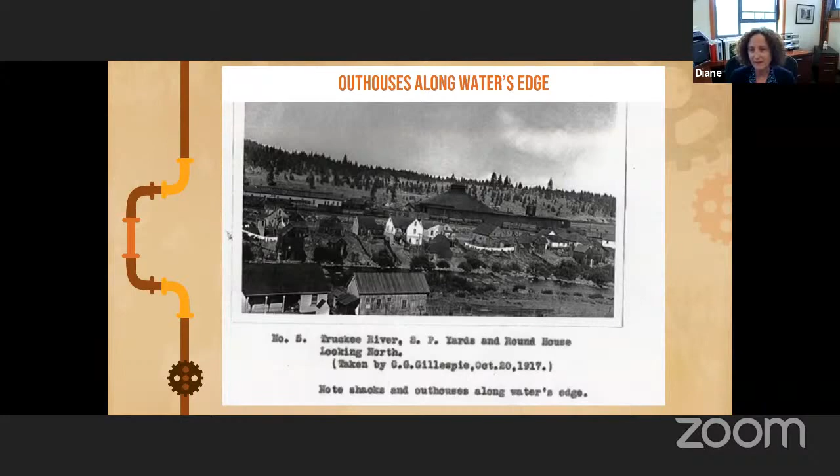Excellent. So the district did make the improvements, one of them being conveying wastewater over the Truckee River instead of into the Truckee River. They formed sewer ponds, which you can see from the 267 bypass bridge, where all the waste came to be processed, percolated, and filtered back in. That was the improvements the district made through the 1970s.

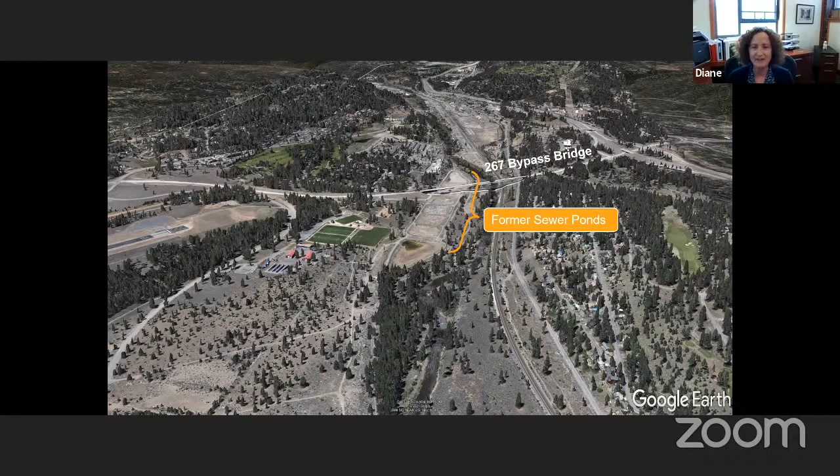So in the next slide, we're going to look at how the district did expand. From 1909 to 1950, the district just serviced the downtown community commercial area. Then in 1950, there was an expansion to the Gateway area, where Safeway, the hospital, and Truckee High School are now.

Then came the 1960s, and testing was done on Donner Lake, finding a high coliform count, which is an indicator of fecal matter. This was mainly due to cabins built along the lake with septic tanks, and the septic tanks were failing. So at the urging of the county, the district went into that area, laid sewer lines, and most of the septic tanks were removed.

Then came the 1970s, and there was further expansion into the Tahoe Donner area, and below that the Northstar area. Also in the 1970s, the Tahoe Truckee Sanitation Agency was formed as a result of the Porter Cologne Water Quality Control Act, which mandated that all sewage be exported from the Lake Tahoe Basin. So the plant was built, and by 1978, it was open.

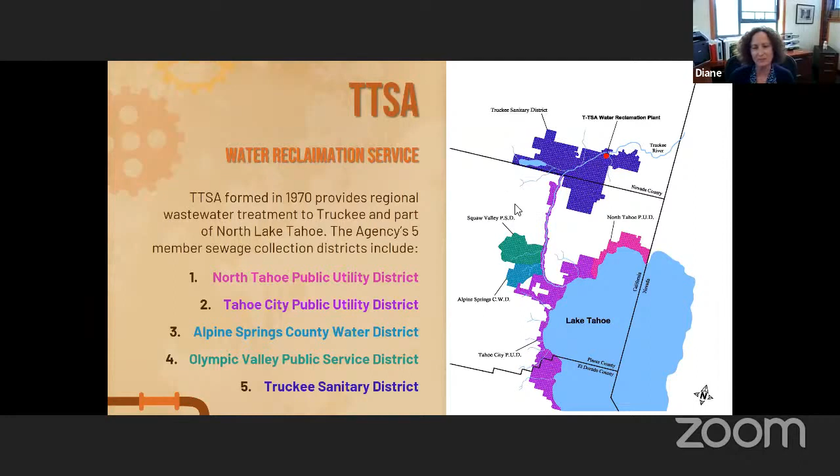From that point on, the North Tahoe PUD, the Tahoe City PUD, the Alpine Springs County Water District, the Olympic Valley Public Service District (formerly known as Squaw Valley), and the Truckee Sanitary District conveyed their wastewater directly to the TTSA water reclamation plant. We got out of the business of processing the sewage, and instead we collected and conveyed the raw sewage to the reclamation plant.

In the 1980s, we extended our service to the Glenshire area. And finally, in the 2000s, as the area was expanding, there was growth in the Grays Crossing, Old Greenwood, and Martis Valley area.

Now I'm going to pass this on to Kellen, who will talk about the operations end of our district and what we do.

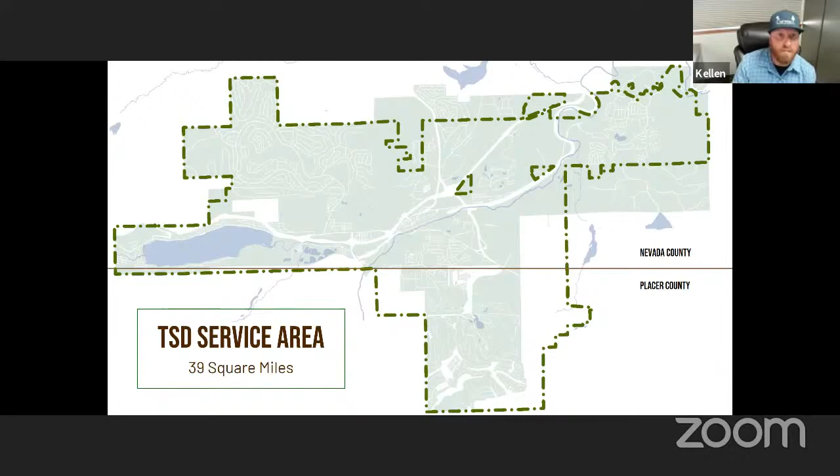Thank you, Diane. My name is Kellen. I'm going to be talking about the assets and operation and maintenance of Truckee Sanitary District. Truckee Sanitary District operates in a 39 square mile area, and we cross 2 county lines. Our main way of collecting the sewer is by gravity and lift stations or pump stations. As you can imagine, we have a very mountainous area here, so we have a wide variety of areas that we actually have to pump out of.

We have 215 miles of gravity pipe. Gravity is obviously our easiest way to collect, so that's what we try to do. That services 13,132 laterals, which are your homes and businesses that we're collecting from. When we can't use gravity, we need to be pumping. So we have 44 lift stations, and those pump into what are called force mains, and we have 16 miles of force main. With gravity, sewer tends to be cleaner and flow better if it's a minimum of 2% grade, which makes it so the solids flow nicely down the pipe and don't clog it. When it's not, we go to other lift stations.

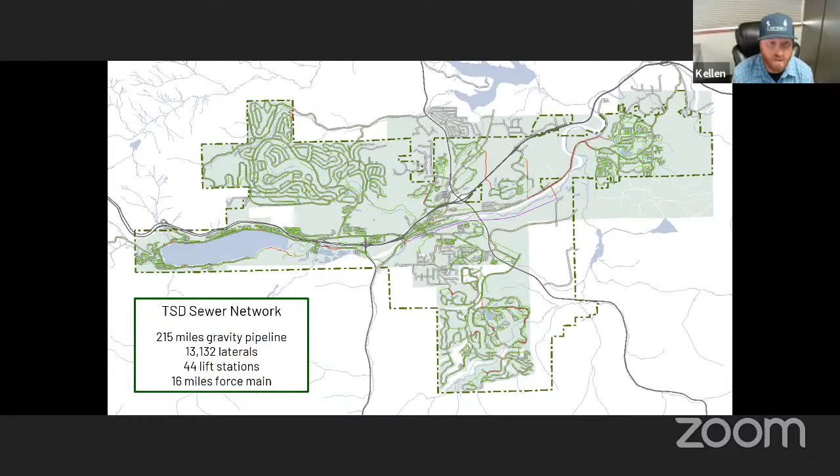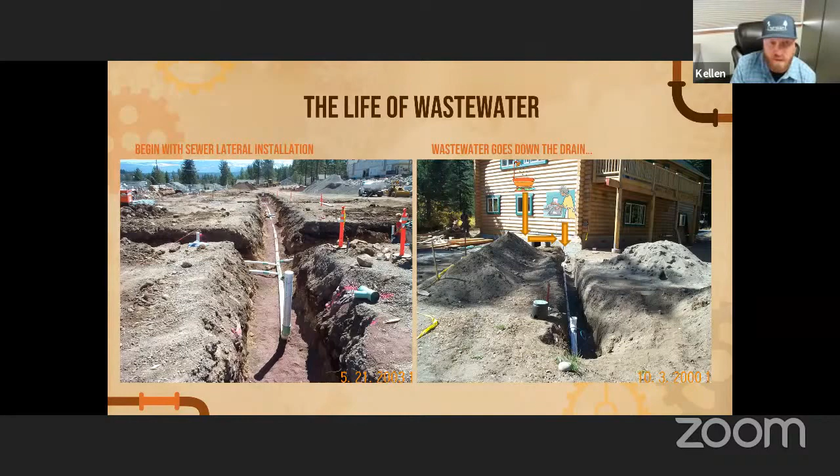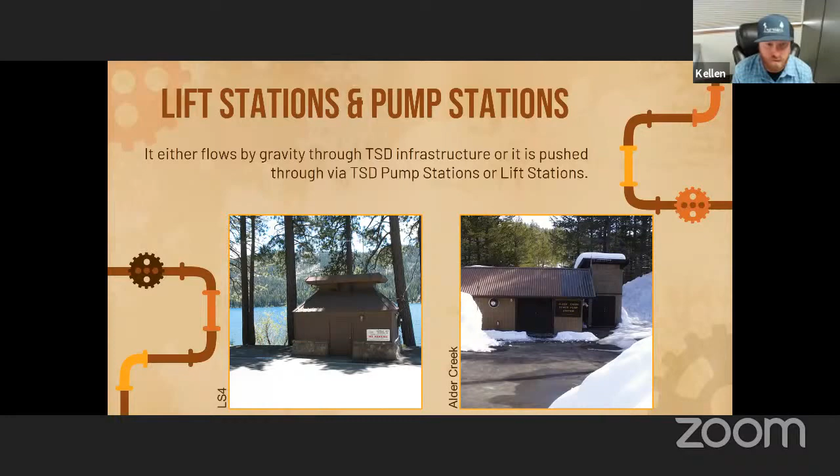It's pretty cool stuff. It's really bad if one of these plugs up, so we have to have a way to actually bypass that.

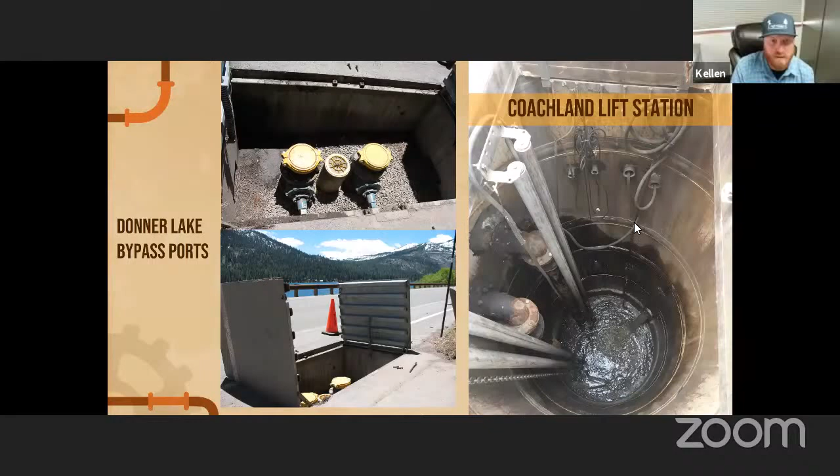Yes, your audio is a little bit staticky. Is anybody else getting static from Kellen's? I'm not sure whether your hands are on your board or something, try and hold as still as you can. I'm afraid maybe it's picking up something else, but hopefully that'll help. Go ahead. Yeah, I don't have it. It's okay.

So now we're getting down to the nitty gritty. Sometimes things get caught in your pipes and block your sewer lines. And so when that happens, we actually have to bring out specialized equipment. We also use this equipment for cleaning and other things.

So this is one of our main workhorses, called a Vactor truck. As you can see on the front, there's a big hose reel, a 1-inch hose reel that we use to clean the sewer lines. Going up and above it is a giant pipe, and this truck is basically a giant vacuum. We use these trucks to clean your wet wells, to hydro excavate, which we'll go over in a little bit, and also in case of emergency, then we need to be sucking out of a manhole, which we hope never happens. I'll talk a little bit more about it here in a second.

So how this works is, on the hose, we have specially designed nozzles, and these nozzles are built to shoot the hose out the pipe. And then once we get to the end, we'll be pulling it back to clean. This nozzle that you're seeing right here in the video is a new specialized nozzle. You can see that the water is shooting out of these jets at a 15-degree angle.

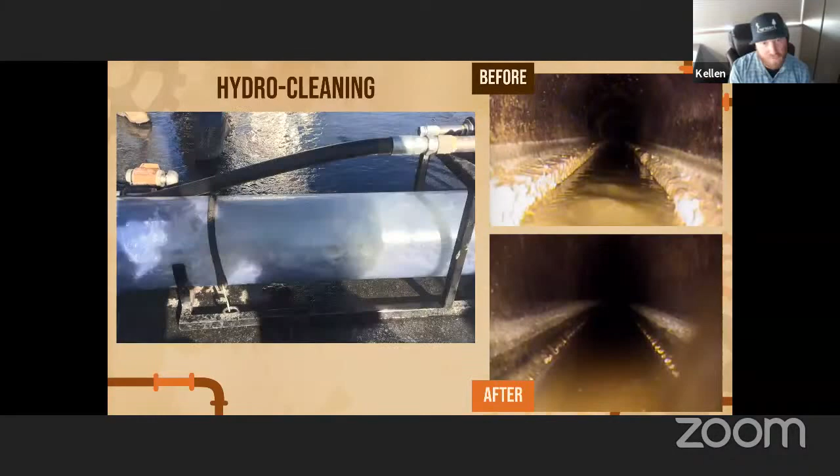This is what we're going to use to actually propel the hose from the bottom lower manhole up to the top manhole. Right now it'll be shooting out and going 200, 300, 400 feet that we need to. You can see it's actually moving a lot of water, pushing a lot of it. Once we get to the end, we'll shut it down and let it reset for a second. And then when we restart it, you'll see a different jet shoot out, coming more of a straight angle at the pipe and a little bit back. So as we're pulling back, it's going to be cleaning this pipe and getting all the grit and everything else out of there.

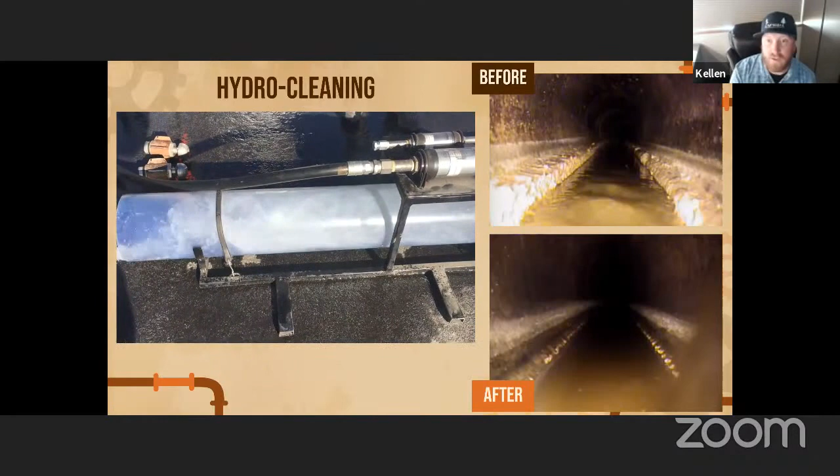If you look at the picture on the top right, this is an example of stuff that we'll be using this nozzle on. These are grease bars. Grease is very bad for our system. It collects — it might be liquid when you put it down your drain, but once it settles and cools down, you start building up grease. On the top picture, you can see the grease. The bottom picture is right after we cleaned it, and all the grease is gone.

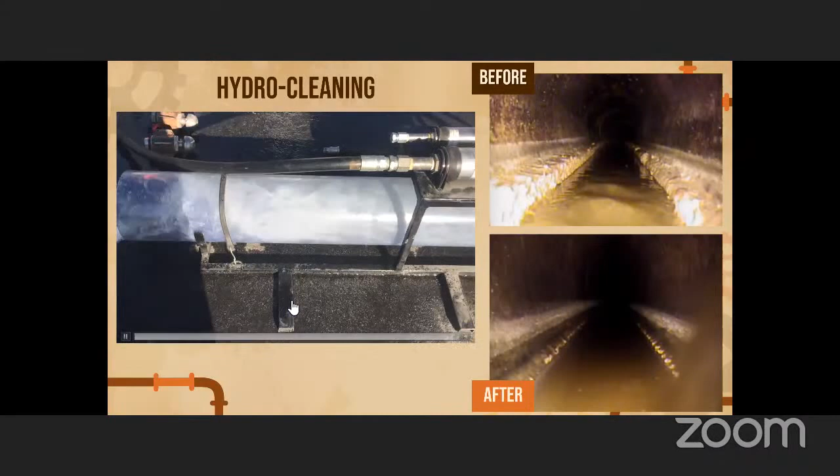Oh boy, I think we lost Kellen. Oh, Kellen, you're muted. There we go. Can you hear me? Yeah, we lost you for a second. Continue, we lost you for a second. Yeah, yeah, I'm back.

Okay, so we also do our pipes through a camera system, and this is how we know if it needs to be cleaned or if we have any defects.

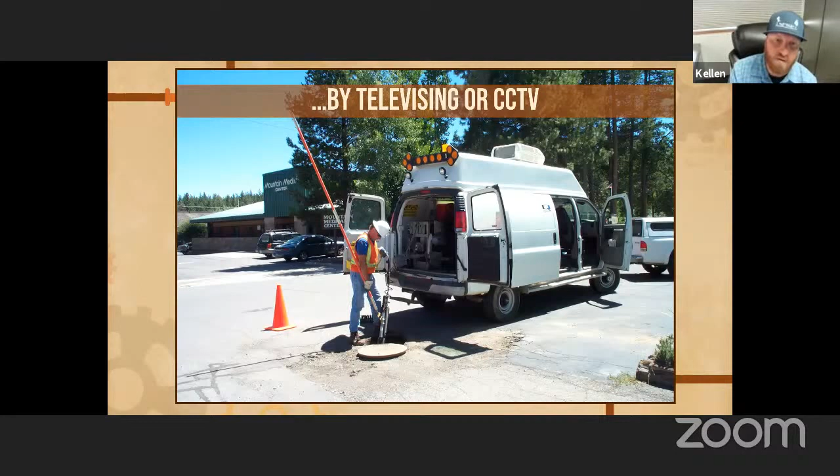What this is, is CCTV trucks and CCTV cameras, which is closed circuit televising. This is one of our employees lowering a camera. What we're doing is we're going through the pipe and actually looking for these problems. We'll have some pictures of the cameras so we can show you, but we are recording all this and documenting the observations that we have, whether it's a defect or not, and it all goes into a computer system and rates the pipe so that further down the road, we can age these pipes and determine when they're going to need to be replaced.

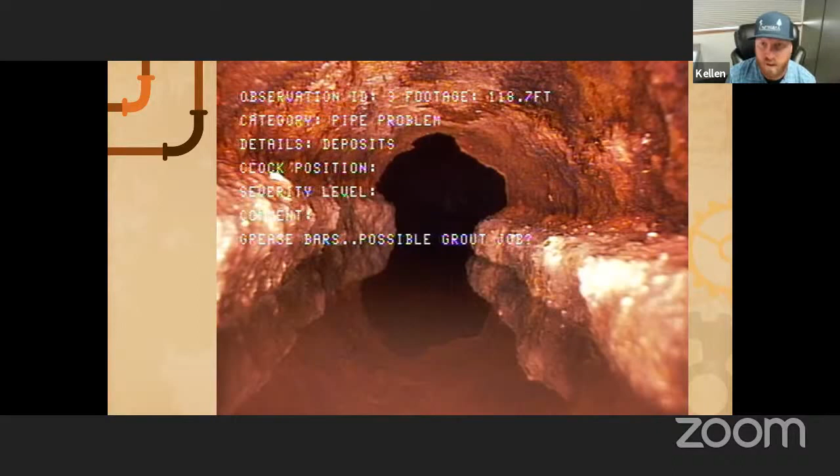Here's some examples. This pipe has a lot of issues with it. We got some grease and some deterioration. As you can see, it looks like the pipe is rusting. That's caused by H2S, a gas that comes from the breakdown of organic matter. So we make these observations, and then we'll deal with it afterward with construction or lining of the pipe.

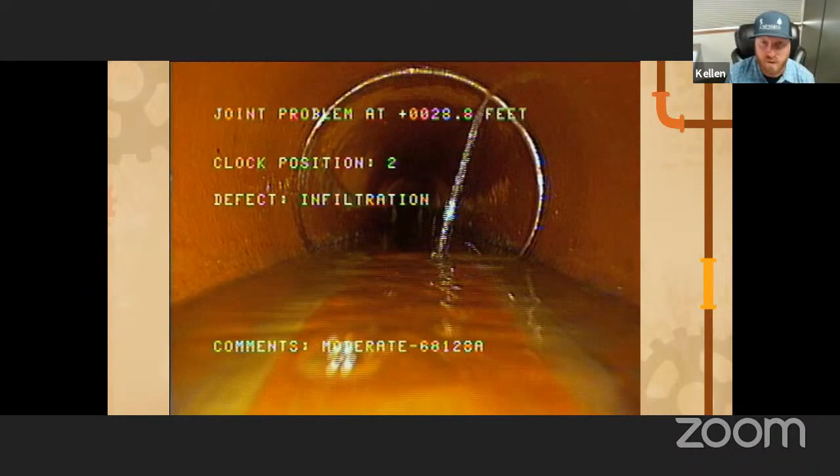Here's another problem we have here in Truckee, well, most people do: it's I&I, inflow and infiltration. What's happening is we're getting groundwater coming into the lines. That's bad because we don't need to be pumping fresh water, or having the treatment plant process fresh water. It's wasted energy and can lead to further problems with erosion of the dirt where this water is coming in.

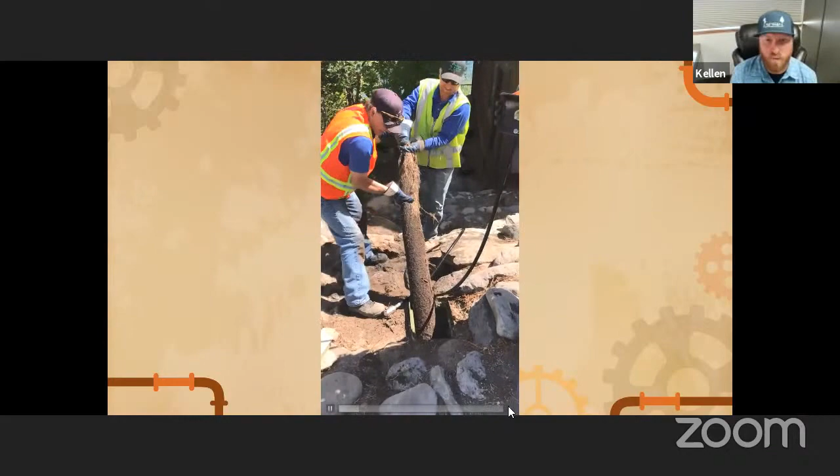Here's an example of a root ball that we just found this last weekend. As you can see, this can be very destructive to your pipes and cause a lot of problems that could lead to backups. We got very lucky that we didn't have an issue, but that's obviously a very extreme case of roots — that thing was 8 to 10 feet long, it was crazy. So when we find these problems, we can locate the exact position of these defects, and then we send out the construction crew.

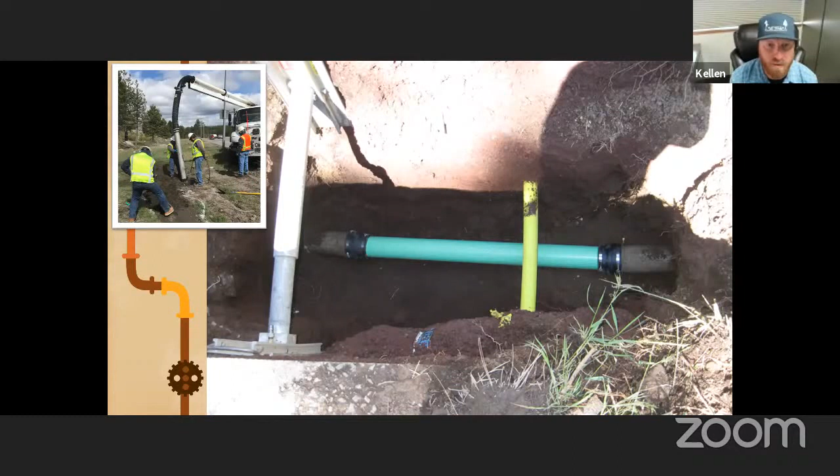Here's an example of one of our repairs. As you can see, the yellow pipe is a natural gas pipe, looks like a 4-inch main. What happened is they came through and hit our pipe without knowing it. You can see the gray pipe on the outside with the green PVC — that's actually our repair. We use couplings to repair the pipe and level it so the sewage flows nice and smoothly through.

When we get to problems like this, we bring in the hydro truck and vacuum — we actually do a hydro excavation. We suck the dirt out while spraying high pressure water to break it up, so we don't hit anything or damage other surfaces. The other long pole on the side of the trench is shoring. We have very coarse sand and red rock here in Truckee, and it's very unstable dirt, so we always have to secure our digs to make sure we don't get any collapses.

That's how we make sure we deal with our problems. This is another system that we use — it's what monitors our lift stations, called a SCADA system. What this does is tell us if anything is going wrong with our systems, like power outages at one of our lift stations, or if it's not pumping right, we'll get high pump calls. Anything that can happen is monitored right here, and we have someone on call 24/7 always manning this, so if something happens, we'll know and come straight out to fix the problem.

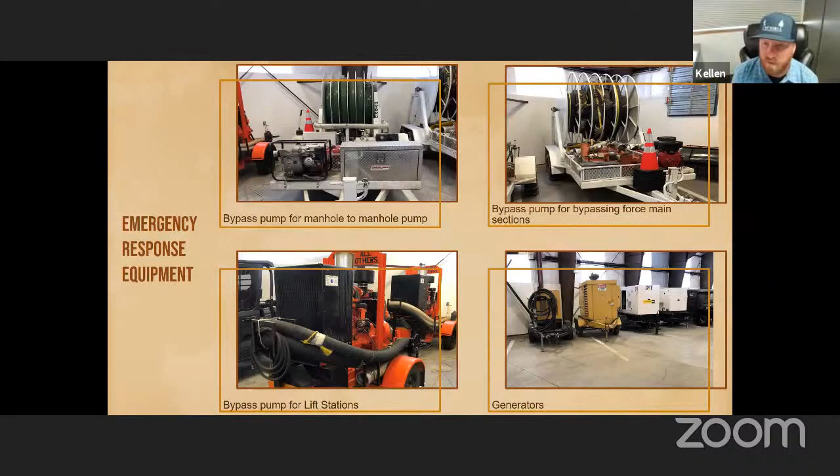As I said, we try to be prepared as much as possible. This is an example - we do this every year. We are constantly training to make sure that if anything possibly happens, we're going to respond very quickly. This is one of our trainings, where we are bypassing the entire system.

It's basically the pump and the lay flat hose. We want to make sure that no matter what happens, we will always be able to respond in a timely manner. Our main goal is always to keep sewage in the pipes. So we will be responding very quickly, and we will be there to fix it.

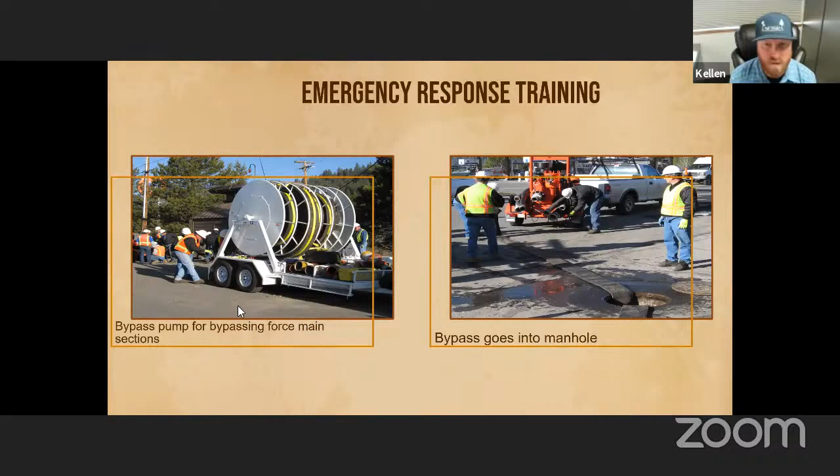It's okay, great. So there's a lot of engineering issues we could chat with you about, but in the name of time, I wanted to share some of the stuff we do regarding flow monitoring. We've got, as Kellen indicated, over 300 miles of pipe out there, and we need to know what's happening in that system. So we've got over 23 flow metering sites distributed at key junctions in the agency to be able to track things.

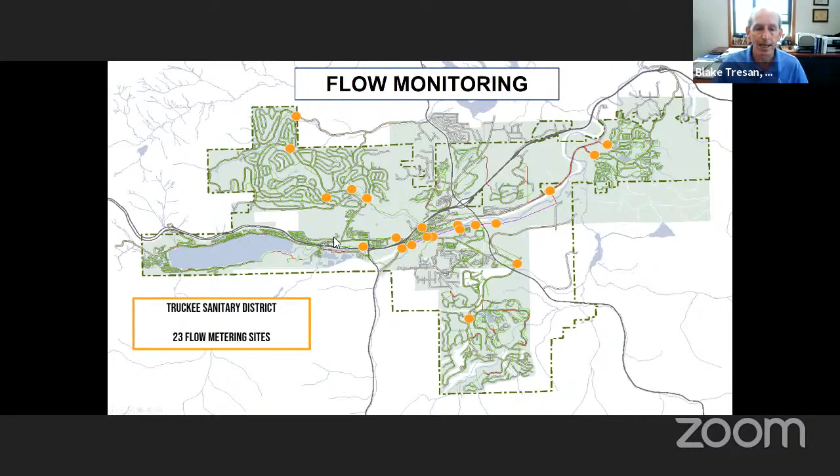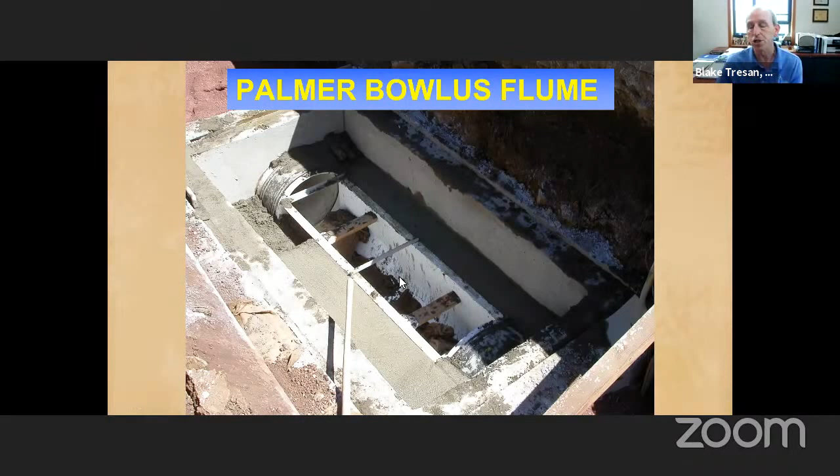And the data we get is conveyed - we have each of these metering sites as a specially designed flume, so that if you put an ultrasonic measuring device that measures the depth of the water, it bounces off the top of the water, and we know how deep it would be if there were no water in there. It gives us the depth of the water, and that correlates to a specific flow. And so this data is real time.

With that information, we can get flow data like this. This is a day in Truckee. Sewer flows follow a traditional diurnal pattern. In the middle of the night, there's not much activity, not much wastewater being generated at a home. You have typically a strong peak in flow in the morning as people wake up and shower and get ready to go to work.

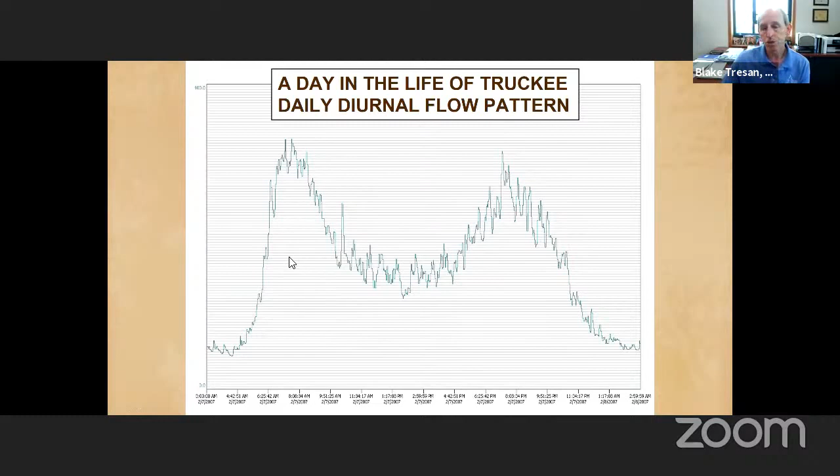During the day, flows go down a little bit. People use the bathrooms, but they're at work. Then they come home in the evening and prepare dinner, do the dishes, do their laundry. You see another large peak in the afternoon, and flows decrease again after everybody goes off to bed. So this is called a diurnal flow pattern - this would be one day in Truckee.

So we have the resolution to be able to look at each individual drainage basin within our area, but we can also aggregate this data so that you sum all of them up to get a total flow for the district, and we'll sum it up to get a total flow per day.

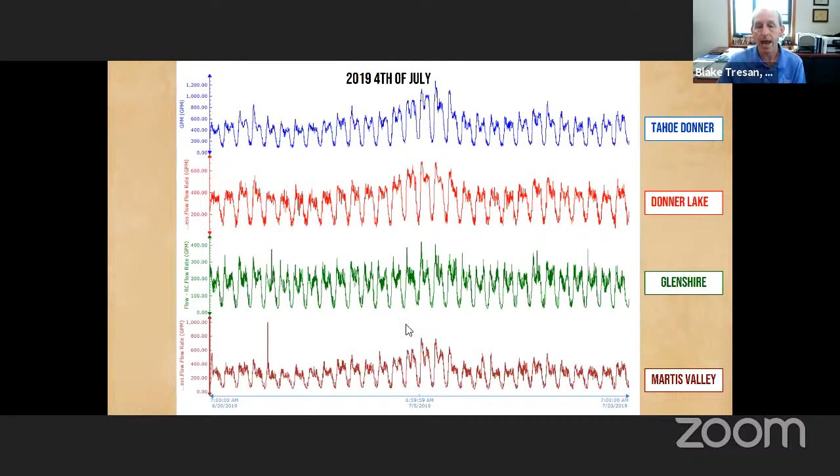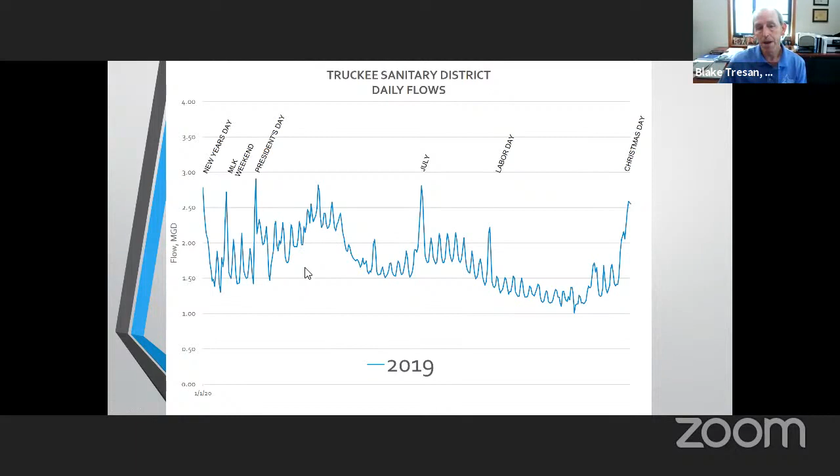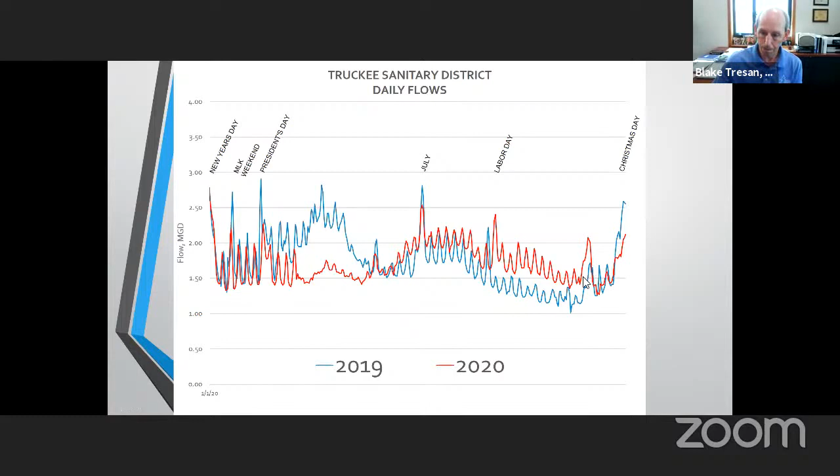The sewer flows actually provide a very good metric for occupancy. And so all the way through into December, we had still high occupancy.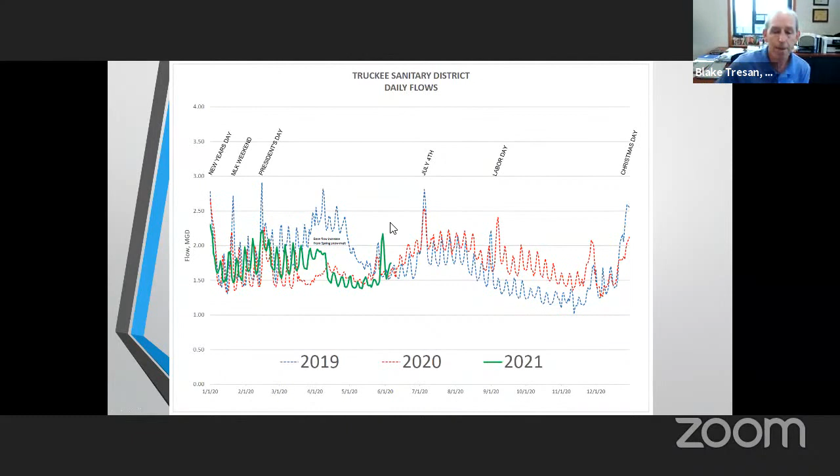So this is a slightly different representation of the same data. This is a year of flow, and this has got about a dozen years of flow. But what really stands out are these gigantic spikes here, and these are large rain events that happened in 2017, early in the 2017 season.

These were FEMA related events, and these are actually the events that dictate how large our sewer has to be, because we can't just size it for normal flow. We need to keep the sewer in the pipes even under events like this. We did a hydraulic analysis, and it showed we'd have to upsize a lot of facilities to account for large storms like this. Our team got together, and this is something I'm proud of.

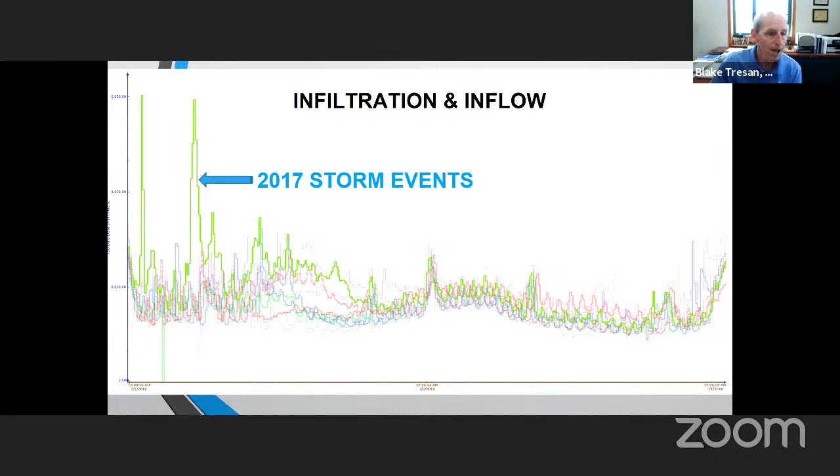Our agency showed some entrepreneurial spirit, which I think is consistent with hopefully the Tahoe Silicon group. We said, where is this water coming from? If you look at some other data we collect, this is our lift station wet well levels. It increases until it reaches a certain point, a float switch is triggered, and the pump pumps the water down, and the water comes back up like this.

This is precipitation on the bottom. You can see there was a very slow rate of increase in that wet well because sewer flows weren't high until it started to rain. Then instantly the wet well started going up and down, so where it previously took several days per pump cycle, we were getting multiple pump cycles in a day when it rained. As soon as the rainstorm ended, the flows went down.

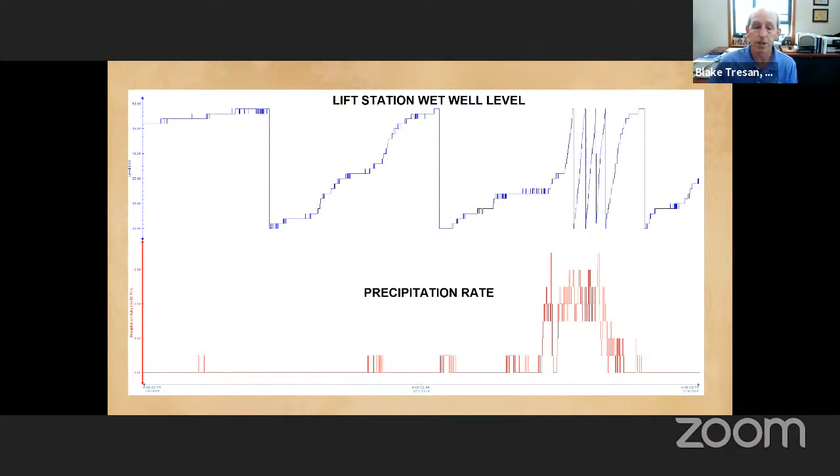So we said, where is this water coming from? This isn't rising groundwater getting into the buried pipes, this is getting in at the surface of the system, where these manholes are at. So we smoke tested these to find out where the leaks are, and when we smoke tested it, we found it's leaking between the frame and the cover. This manhole frame cover sits inside this frame.

We pay extra money to get manhole frames with O-rings integrated into their covers so we get a watertight seal, and we always assumed they were watertight. But when we smoke tested it, we found that almost all of our manholes leaked. I'm going to show you the smoke testing, and you'll see it come out. But what we came up with was a product that didn't previously exist, a kind of petroleum-based product that's used for another purpose in the industry, but not this one, and it works really well. We reached out to the manufacturer and have now filed a patent with them, and have a royalty agreement for the sale of this product, which is going to hit the markets in September.

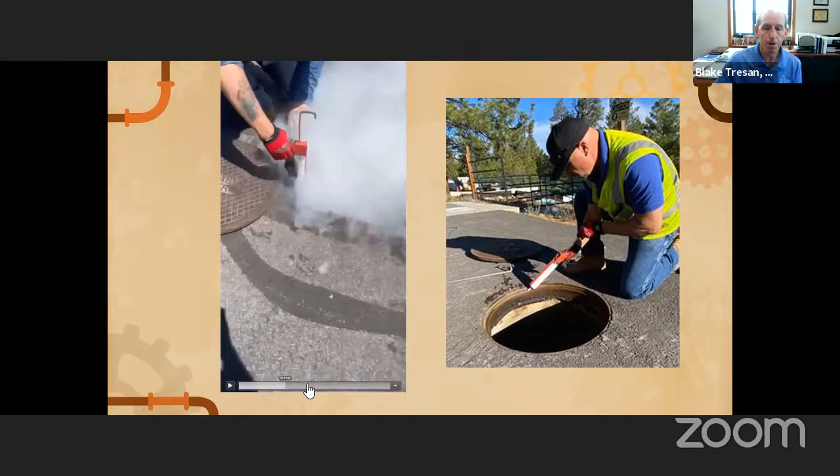But I'm going to show you this video. You can see the smoke exiting this manhole, and wherever smoke comes out is where water is going to get in if it's raining. So he's going to apply this product around the manhole. I'm going to see if I can speed this up a little bit. He just goes around it, then puts the manhole cover back on, and it pretty much seals up. There's still a little leak over here, but he didn't get that side.

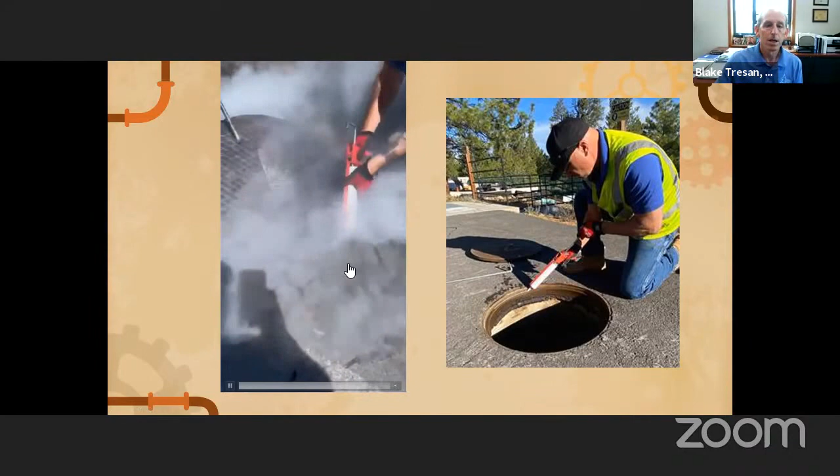So he's going to open that back up and apply this product back on. There are all sorts of products on the market for reducing I&I because of the problems it causes with possible spills, and nothing's getting out. This product lasts until you open it again.

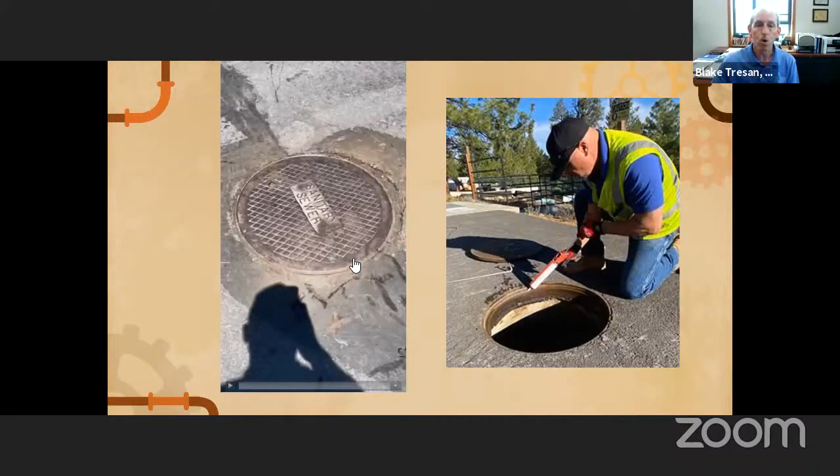We typically don't open manholes sometimes for 1 or 2 years at a time. You can see a picture here of how he's applying it. Pretty exciting to see this product get put on the streets. It's going to reduce a lot of water getting into the system, saving agencies from having to upsize their facilities, causing spills, or handle the operating costs of pumping and treating all the surface water that gets into the system that's not supposed to get in there.

So that's just one engineering item that I thought you guys would appreciate. All this work comes at a cost, and so I always like to share a little bit about our finances. Our revenues come from two main sources: one is we get a portion of property taxes, and two, we charge user fees to our customers.

This is coming right out of our fiscal year 22 budget that's going to our board on Thursday. For the coming year, we're anticipating approximately $11 million in revenues, and that goes out to pay for salaries and many salary-related items. Our services are very labor-intensive, doing TVing, cleaning, and construction work. A little bit of difference in money helps offset the fact that we also have capital improvements we have to do above and beyond operations.

The capital revenue side comes from connection fees for new people connecting to the system, and that helps pay for a portion of our capital budget. In general, our revenues and expenses are pretty much equal to each other. As part of our budgeting process, we do a 20-year window looking forward.

You don't want to look down at your feet or you'll trip in the hole right in front of you.